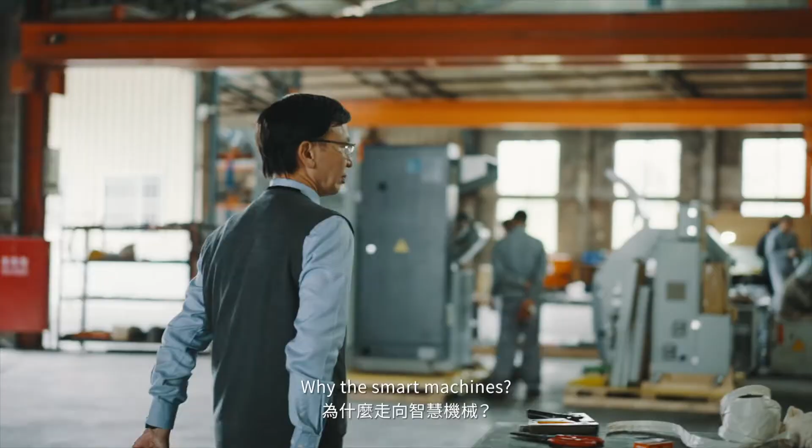Why the smart machine? Because the material is getting more and more expensive, only the smart machine can solve the problem. Being one of the major global players in the woodworking machinery industry, this Taiwanese manufacturer has been servicing customers since the early 90s.

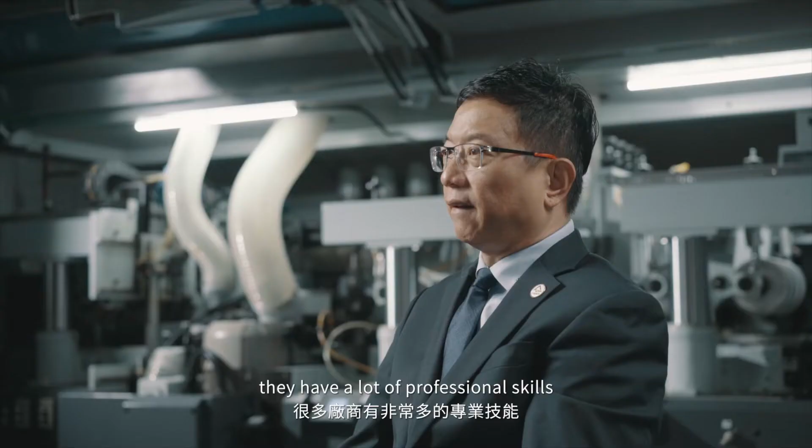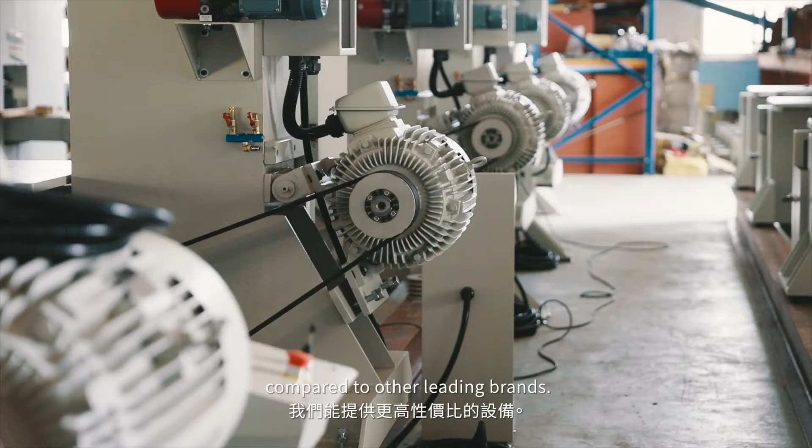In addition, we can deliver much better machine pricing and performance compared to other leading brands. And then you can use your iPhone, iPad or laptop to monitor your production situation.

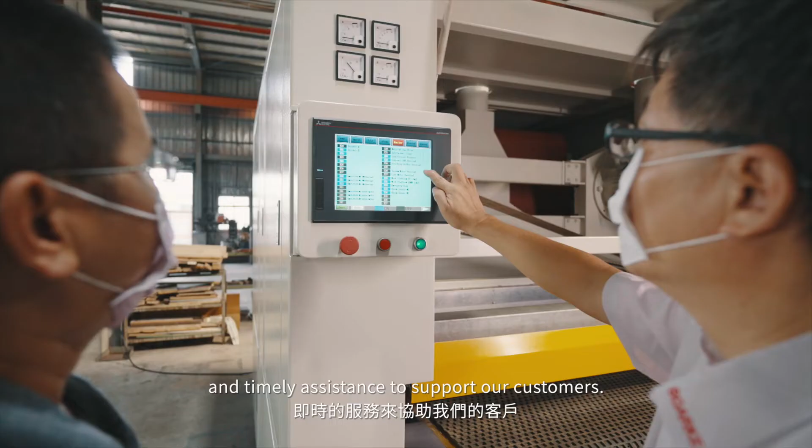How to deliver the best quality and user experience? Customer service is very important. As time goes on, we will always offer the right product and timely assistance to support our customers.

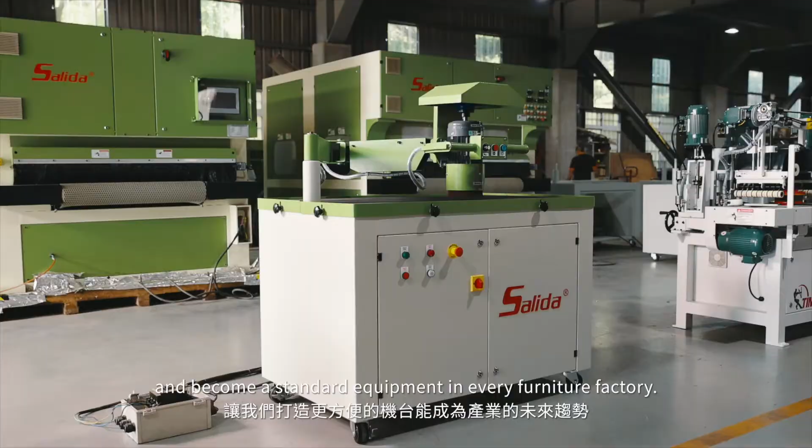To innovate our machines to be user-friendly and become standard equipment in every furniture factory. We welcome you to visit the Wood Taiwan Show. See you soon.

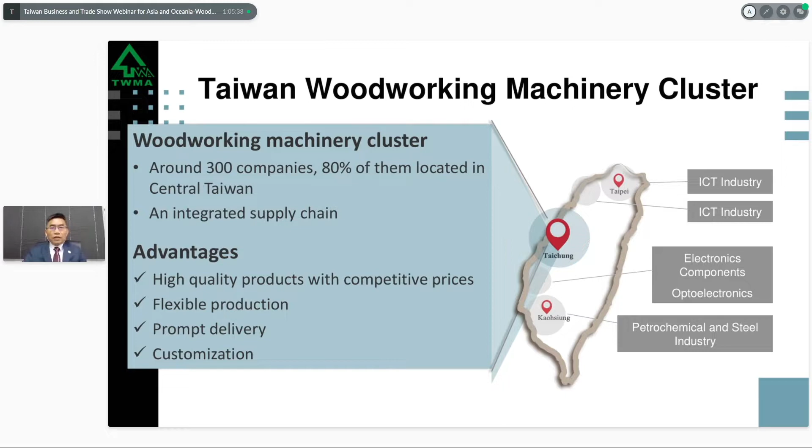We have several advantages. We produce very high quality products at competitive prices, and our production is very flexible, so we can have very quick delivery and also do customization.

Taiwan is the world's #4 largest exporter for woodworking machinery. Back in 2015, 2018, and 2020, every year we have tremendous growth in export. Last year we already reached around $700 million US.

That's a great deal. Here we can see the top 10 exporting countries of Taiwan woodworking machinery in 2020, like USA, China, Canada, and Vietnam, which occupy almost 80% of our market share. After that is Germany, Australia, Japan, and Indonesia, about 2% to 1%.

The rest of the market is in Southeast Asian countries. Nowadays, we are trying to develop and promote more in the Middle East and African countries.

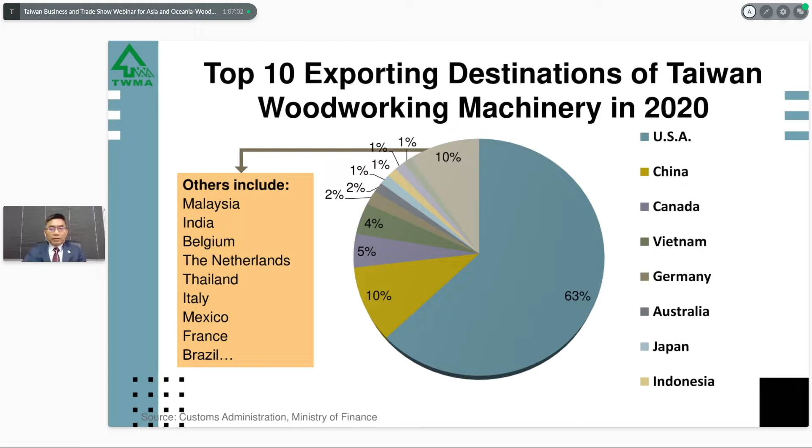Everybody knows that in 2013, Germany announced Industry 4.0, and Taiwan is trying to follow this trend. So here we have 4 sections. Number 1, Taiwan woodworking machines do automation. We develop automated equipment and can integrate all the product lines together.

Second is digitization. We do data analysis and cloud computing, and we also connect our machines together to become the Internet of Things.

Third is intelligent solutions. We help our customers produce their products, increase efficiency, and reduce costs as well.

Finally is customization. As I mentioned earlier, Taichung is a big industrial zone, so with this supply chain, we can do customized products.

The COP26 climate change meeting has already finished in Glasgow, UK, so everybody is trying to reduce carbon dioxide and use sustainable energy. Our Taiwan woodworking machinery industry is striving for green manufacturing as well.

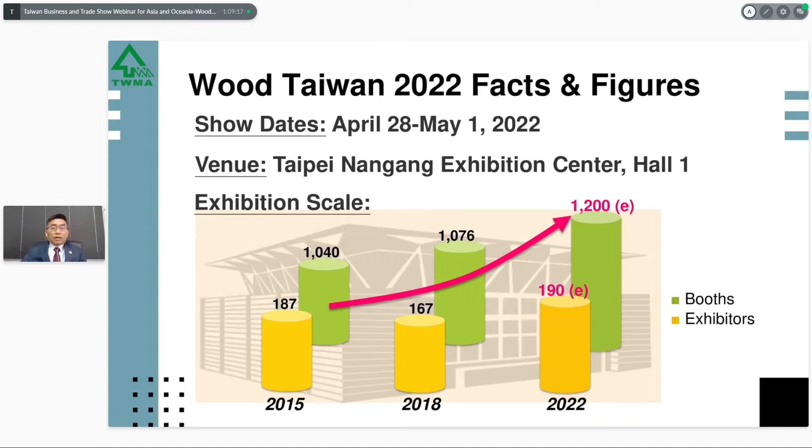We try to expand categories like hand tools, wood panels, and boards. Apart from traditional machines, we also do automation and intelligent solutions, using equipment and digital technology to provide intelligent solutions.

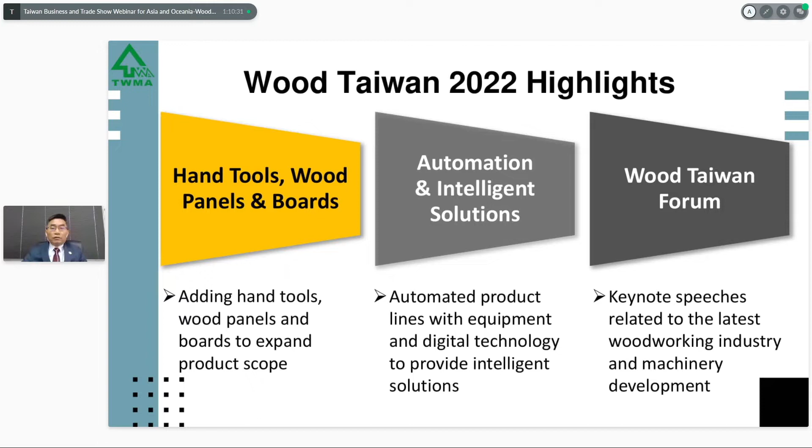In the meantime, we will invite many famous speakers for our latest woodworking machinery technology development at our Wood Taiwan Forum. We can see Taiwan is like the heart of the world.

So when we ship to North America, Australia, New Zealand, Korea, Japan, China, Russia, and Africa, it's very easy. You are more than welcome to source any kind of woodworking machinery in Taiwan. Again, I would like to welcome you to come to Wood Taiwan during April 28th and May 1st, 2022.

Okay, so this is the second topic. I'm going to talk about our virtual showroom. Here's the entrance, the lobby of our virtual showroom.

We can see many records of photos and albums, export statistics, our exhibitions around the world, and contact information for TWMA. We have 7 sponsors in 2021.

Thanks to these sponsors. As I mentioned earlier, we have nearly 300 members, so these are all the participators of this virtual showroom.

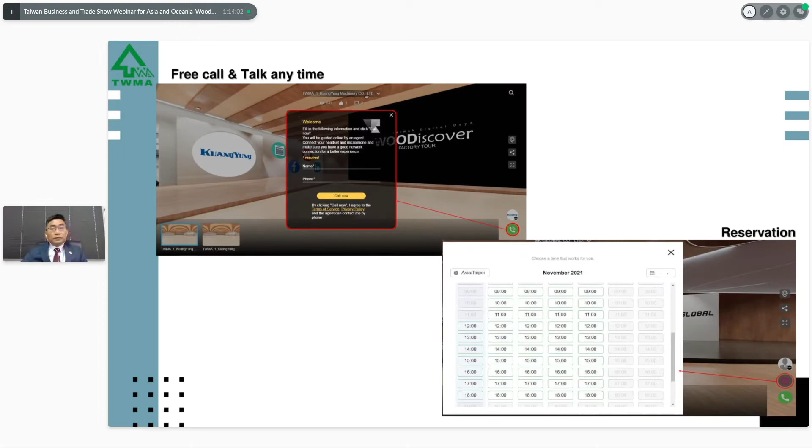So I will make a demonstration for the company tour and machine tour later, including the free call and talk at any time feature. I'm gonna make a very brief demonstration so you can understand better. You can also type www.twma.org.tw/showroom.

Okay, this is the entrance of our virtual showroom. See, it's totally different from our traditional website. So we click the sponsors here, for example, we will have a company tour.

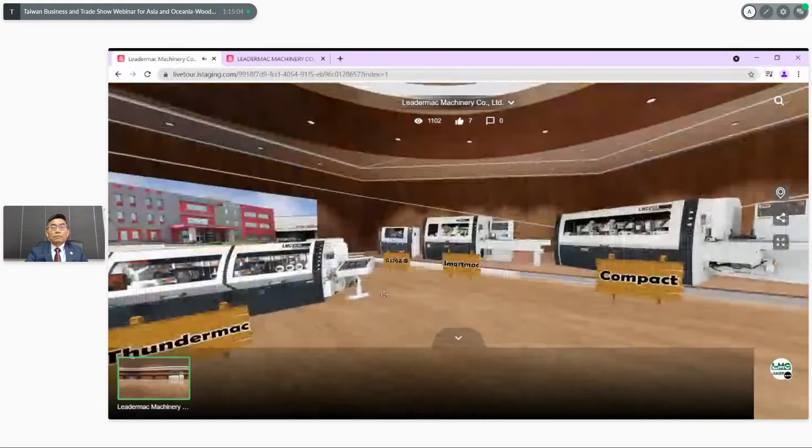You can show your company as well. You enter the main office and go to maybe the smart manufacturing room.

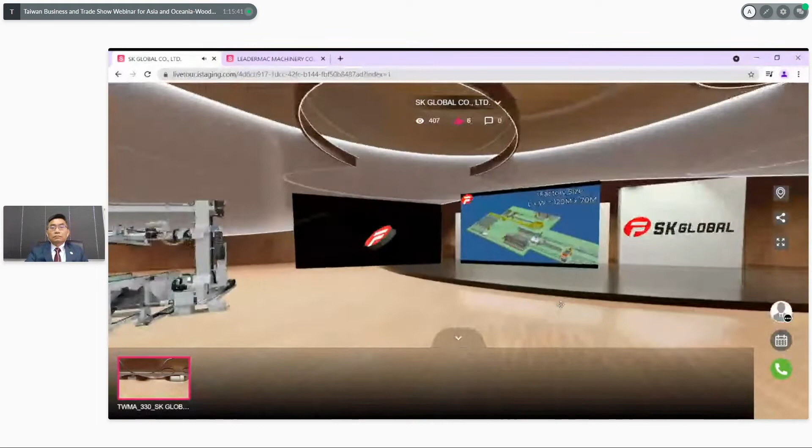And you can go to the showroom. Next is the machine tour example. You can have the video, you can see the 3D animation, and you can see all the machine photos in real and all the specifications.

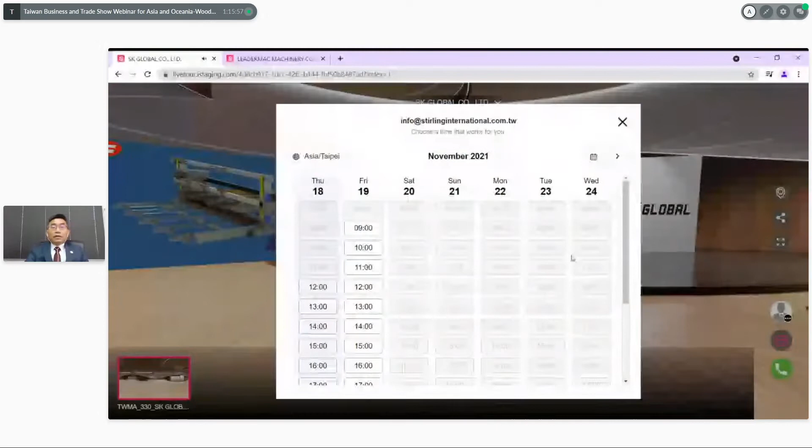Here is very interesting. You can see that we try to make time and days so you can reserve when you want to talk with the supplier. Just simply leave your name and email and submit.

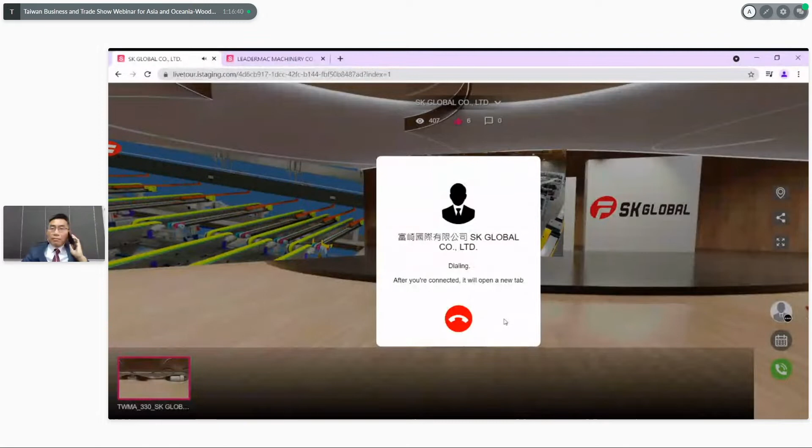You can make a phone call at any time, and the supplier will guide you. Like now, I'm making an example call. So when I receive this phone call, I can guide the buyer to see all our machines. See how this is very interesting, right?

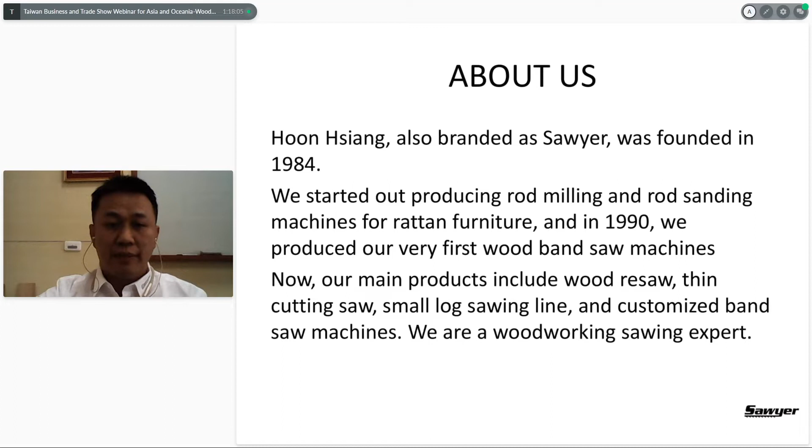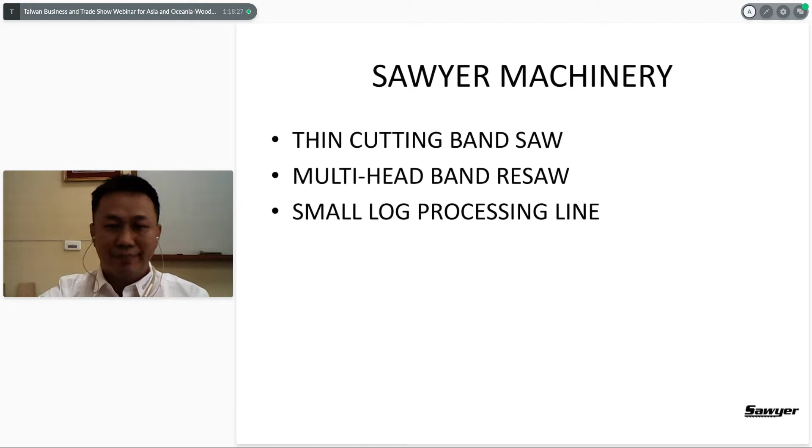Anybody cannot hear me? So for the thin cutting band saw, we can do engineered flooring, musical instruments, and the multi-layer of interior furniture. Let's play the video.

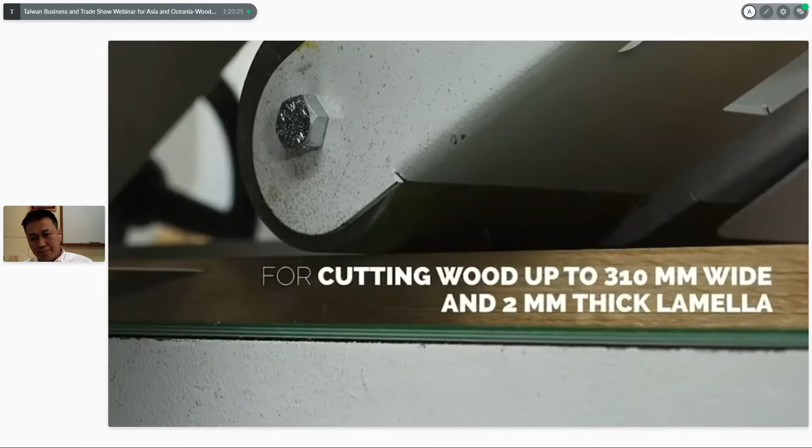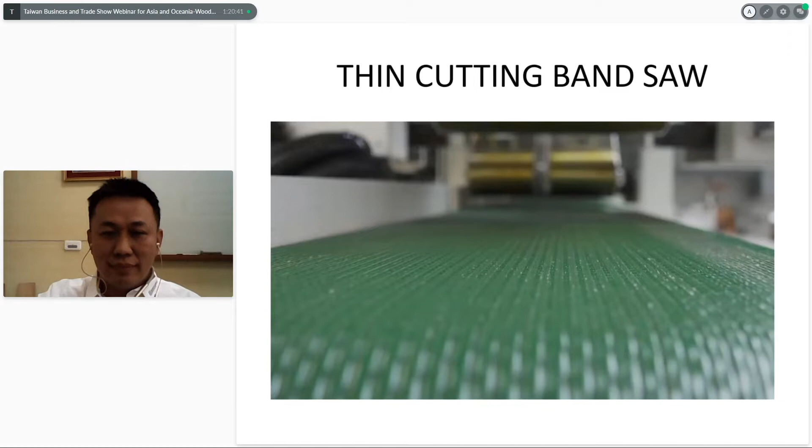Okay, with the thin cutting band saw, our advantage is we only have a 1.2 millimeter saw kerf. Compared with the circular saw, we save the material. Okay, let's see the second.

It's a multi-head band resaw. For the multi-head band resaw, we have the horizontal type and the vertical type. For the horizontal type, you can choose one head up to 6 heads. For the vertical, you have a single or two heads.

This machine is good for saving. For example, with a 2-head band resaw, you can cut 2 times with 1 pass, so you save 2 people.

Then, next is the small log processing line, which is a custom machine. We talk with the customer to see what the customer needs, then we develop the machine. Let's play the video.

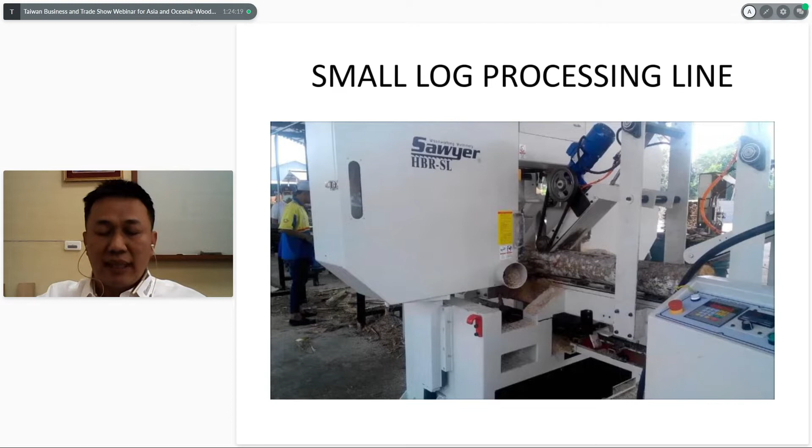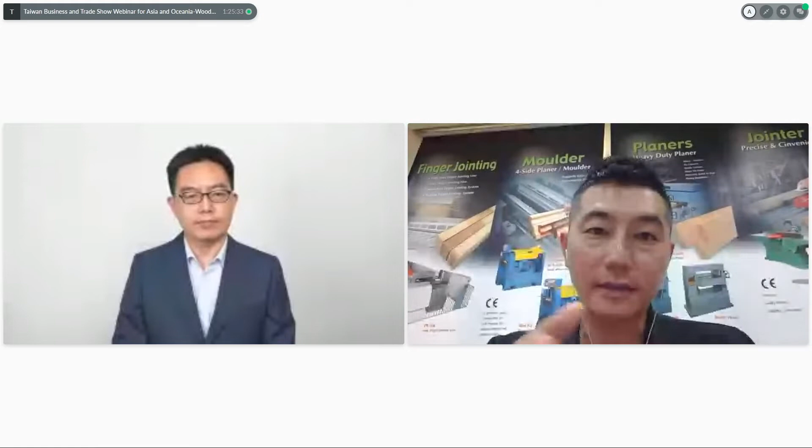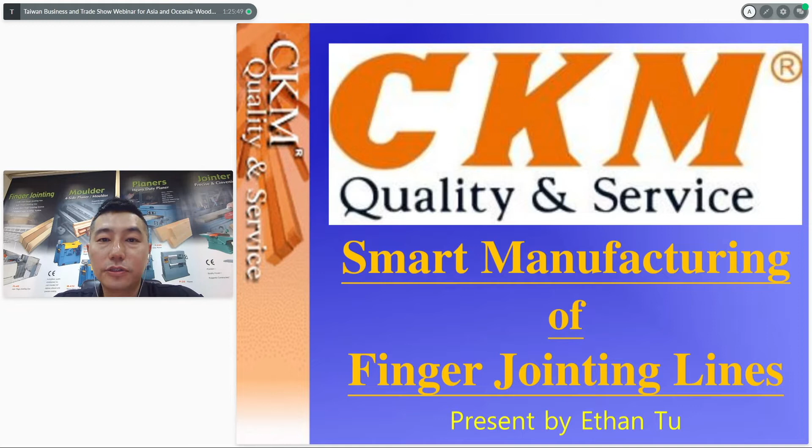Hi, thank you Mr. Eli for the introduction. Ladies and gentlemen, my name is Ethan Tu. I'm here to present to you our smart manufacturing of finger jointing lines. And before I do so, I would like to briefly introduce CKM company to you.

CKM's full company name is Zhenguang Woodworking Machinery Works, established in 1966. We are located in Taichung, Taiwan, and have 55 years of history making woodworking machinery.

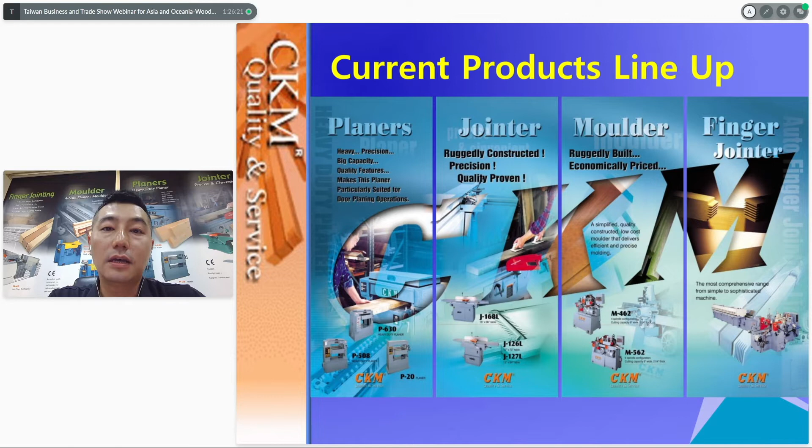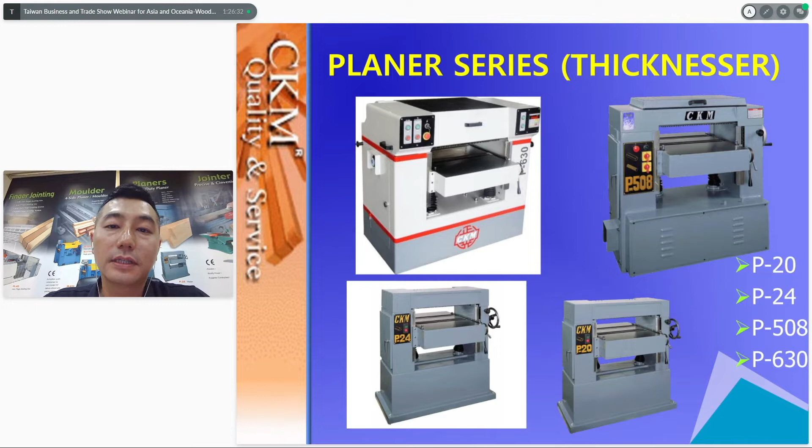Our current product lineup includes finger joint lines, planers, jointers, and light duty 4-side moulders. For jointers, we have 3 models. For planers, we have 4 models. For the light duty 4-side moulder series, we have 2 models.

For the finger joint lines, today's topic, we have been building finger joint lines for over 41 years, starting from manual up to fully automatic, and also vertical type and horizontal type.

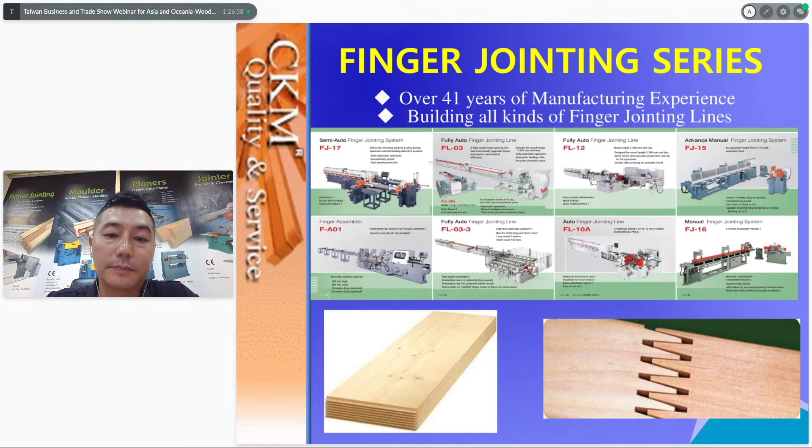Let's play the video. I'll show you what it is.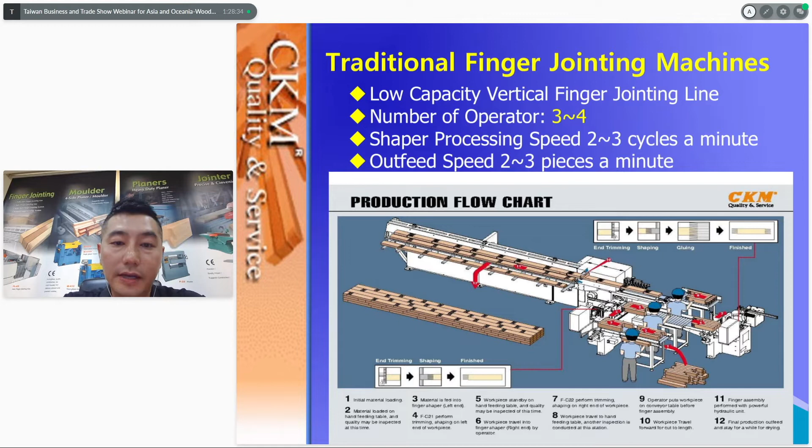Because of this, we realized that nowadays labor is very hard to find and salary costs are getting higher. So in year 2000, we developed and upgraded our system to a high capacity, fully automatic finger jointing line. It increased the speed from 2 to 6 cycles, and reduced the operators from 4 down to 2. Let's play the video.

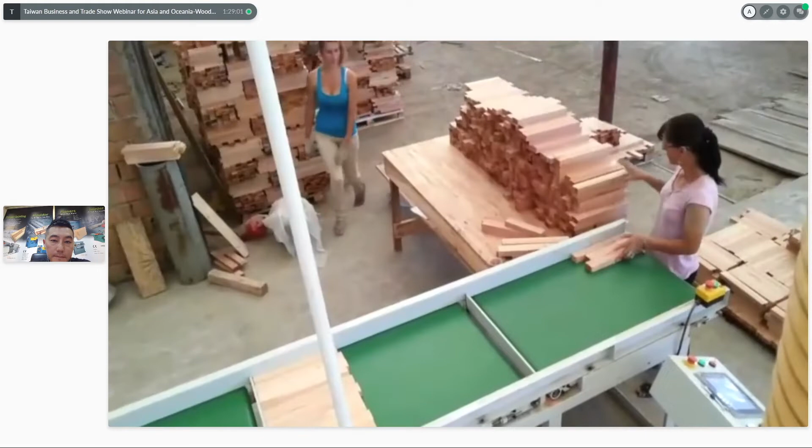In this video, you can see we use a conveyor type to get the products into the press. Only 2 ladies are needed to operate these machines.

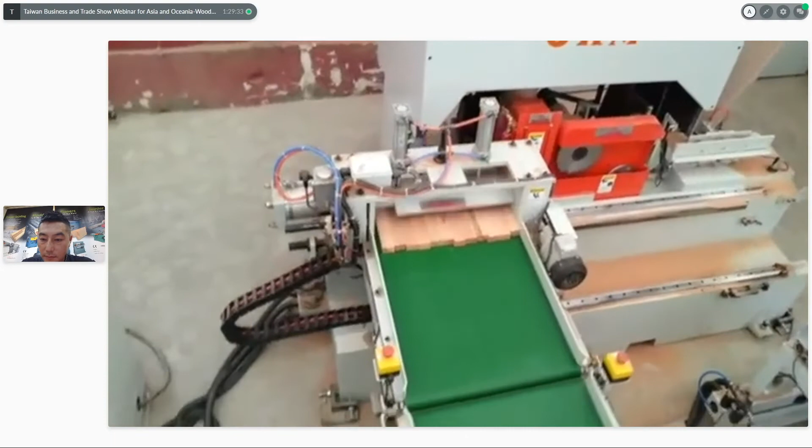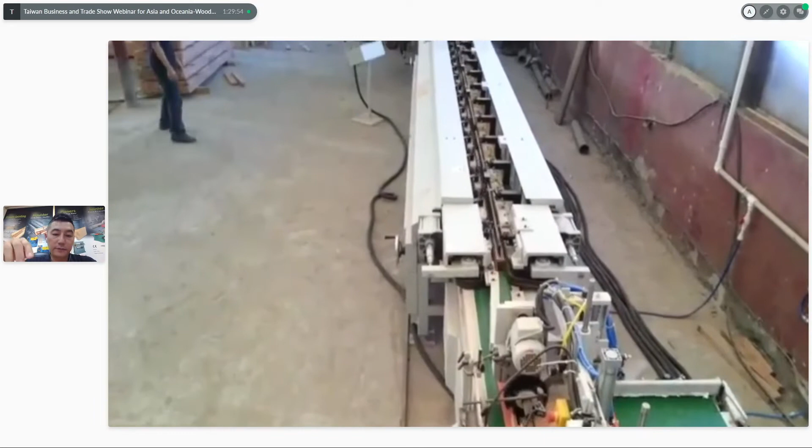There's no middleman in between the shapers. The conveyor type transfers material from one shaper to the other, and we also use flipping tables to get the material from the shaper to the press. So there's also no middleman in between the shapers and the press.

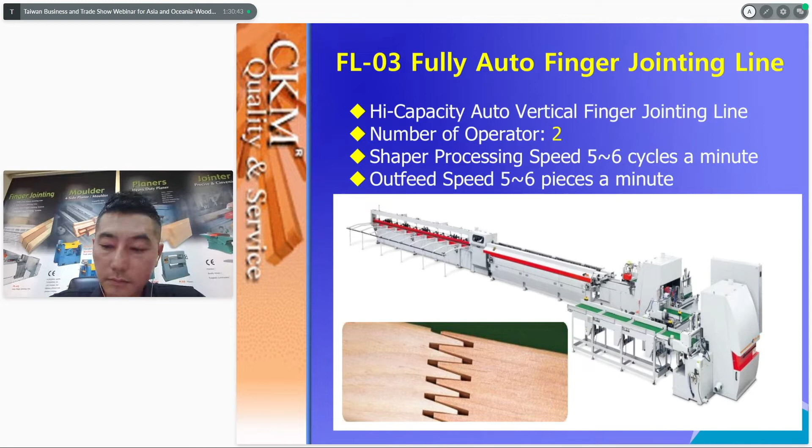Not only the vertical machines have we upgraded to a fully automatic line, but also the horizontal type products we have upgraded to a high capacity horizontal finger jointing line. Let's play the video.

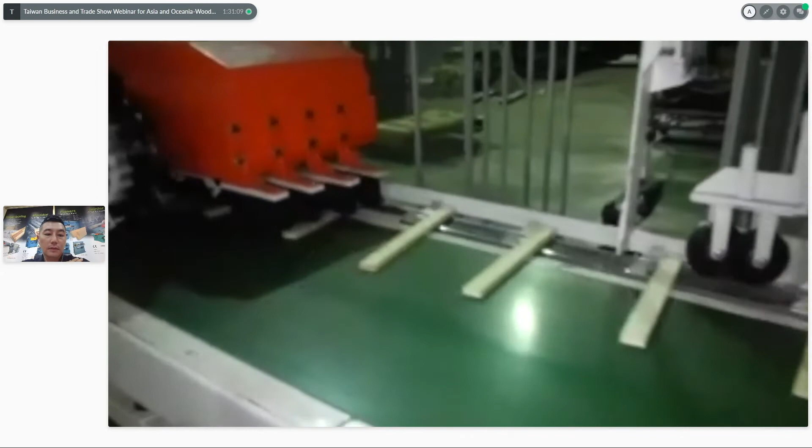If your product is mainly horizontal type, this is the right machine for you, because it can produce up to 120 pieces a minute. Output is seven pieces a minute.

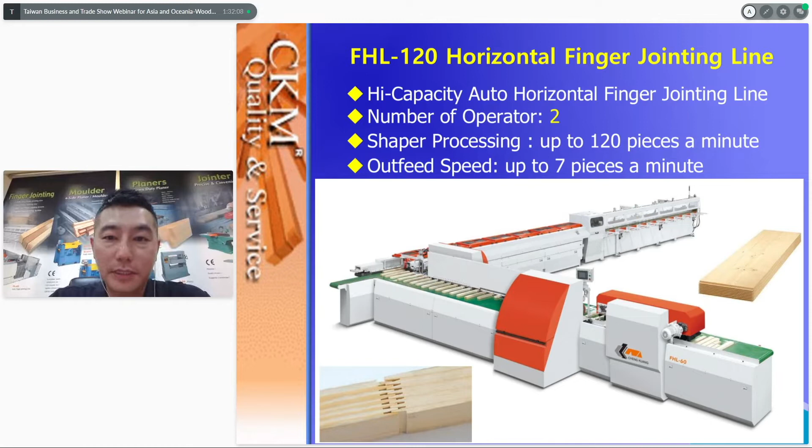That's the finger jointing machines. As I said, we know that operators are very hard to find nowadays.

So two years ago, we developed a new product called stackers, placed at the back of the press, which reduces the two operators needed to simply carry products on and off after the press. We use a touch screen to operate it. Let's play the video and I'll show you what it is.

In the video, you can see that normally you would place operators at the back of the press just to carry the output out of the press. But with this stacker, you can eliminate those operators.

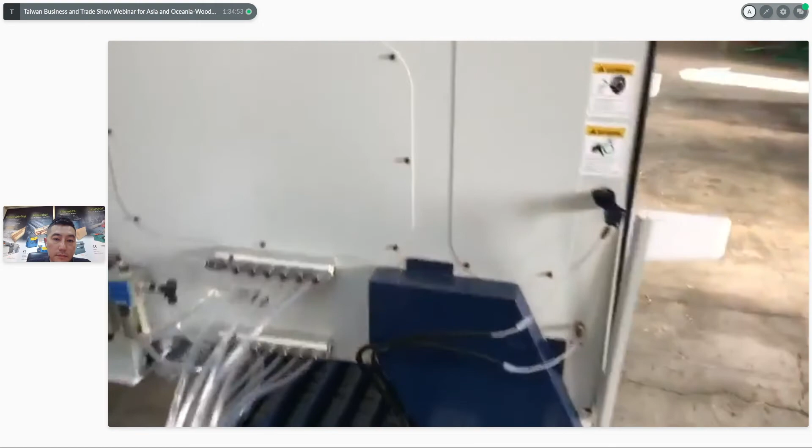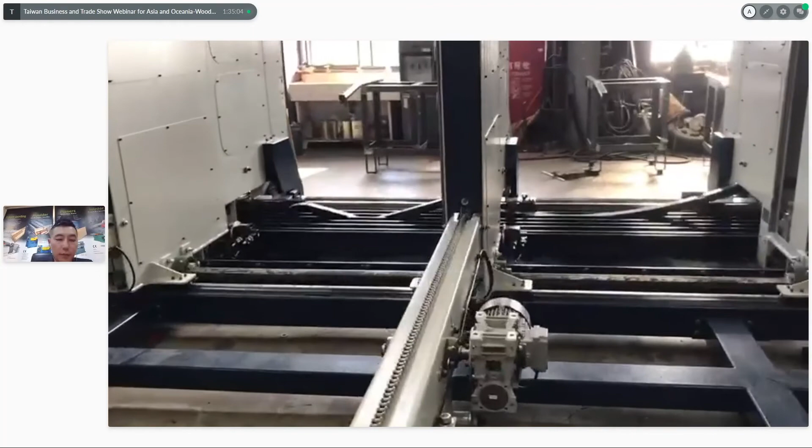Once you type in the position where you want to pick up your product, along with the length of your materials, the pickup head will automatically go to the position you set up. Very easy.

With all the machines combined together, fully automatic plus stackers, this year we upgraded to a fully automatic line with everything together, which helps reduce the operators from 4 down to just 1. At the back of the product, you simply use a forklift to pick it up. Let's play the video.

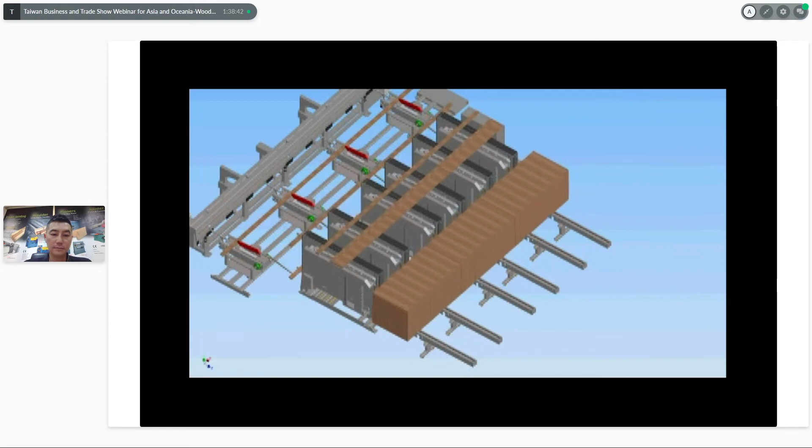After this video, with these machines, you can really minimize your waste and maximize your profit. If you have more questions about finger jointing lines or any products that we made, please feel free to contact me.

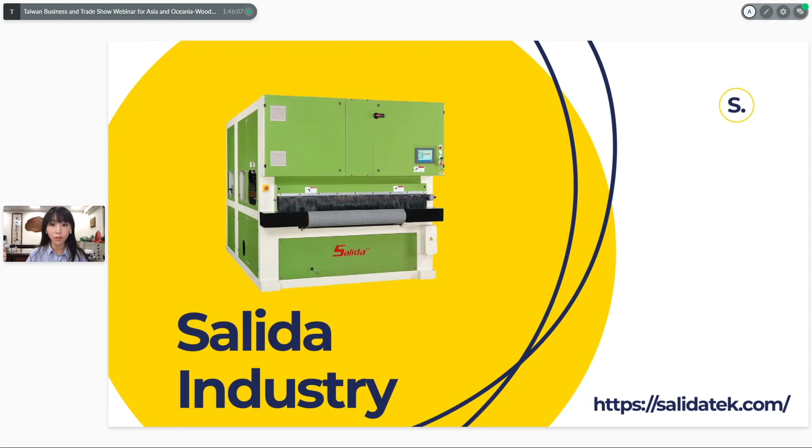Salida Industry was established in 1992 and has manufactured various surface sanding machines for more than 30 years. We produce not only woodworking machines but also metalworking machines for OEM business.

Firstly, I would like to introduce our woodworking sanding machine. This is our heavy-duty type of woodworking machine. Our H2RB is an advanced sander that is proficient in sanding various types of panel. The main idea of the H2RB is to avoid the main disadvantage of today's drum-based sanding machines.

Drum-based sanders generally work with a sanding drum that is only in a tiny area in touch with the workpiece. Our H2RB sanding belt includes 96 sanding strips and provides a wide sanding area in touch with the workpiece, so this machine reaches all edges and leaves no dead corners. The adjustable sanding option on the PLC helps the operator set the machine to their special sanding requirements.

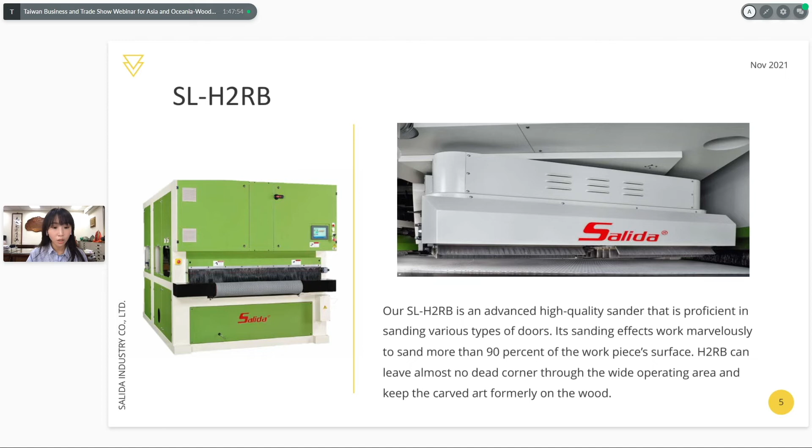And then I would like to show you this machine. So let's play a video for the H2RB.

Next, I would like to introduce our Moulding Sander 300 series. The Moulding Sander 300 series is a very well developed product, providing 8 functioning heads. The Moulding Sander 300 series linear brush sander is designed to help with everyday linear profile sanding needs. It can be used for white wood sanding and sealer sanding for linear parts such as molding, flooring, furniture components, and window parts. The machine works well as a standalone unit or as part of a finish line.

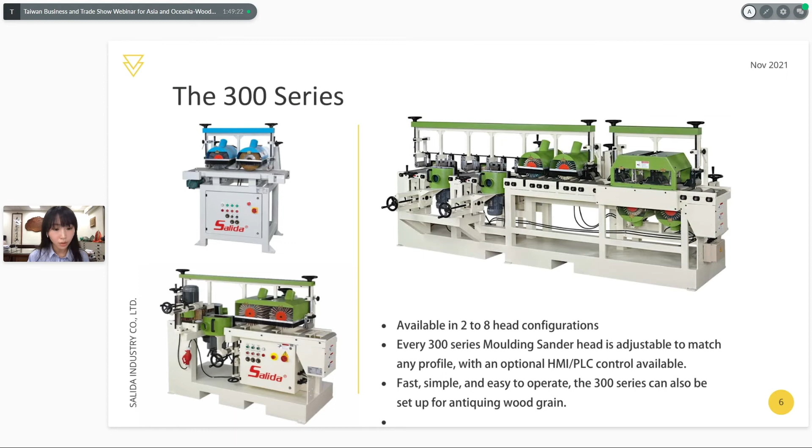Next, I would like to show you this machine's details. So let's play a video.

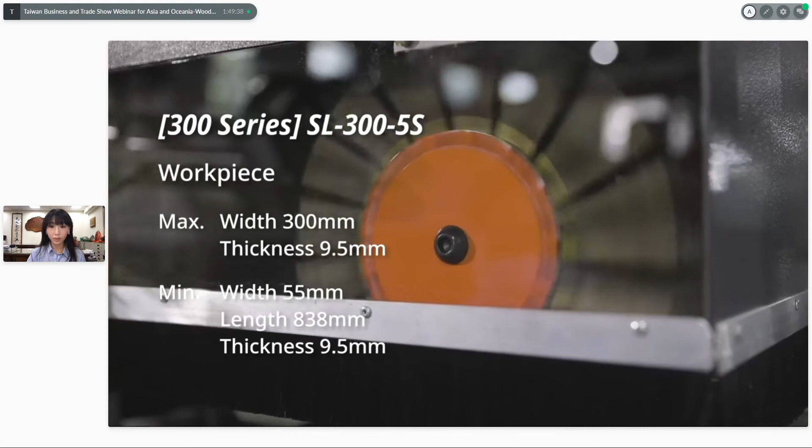And then I would like to introduce our metalworking machine. This is our heavy-duty type of metalworking machine. The rotary deburring machine is the most advanced system in the current industry. The RRA rotary brush machine is an automatic machine for deburring, finishing edges, laser oxide removal, and heavy slag removal. It can also process deburring work for different shapes or thicknesses of metalwork at the same time.

So I would like to show you more details about our RA. Let's play a video now. Thank you.

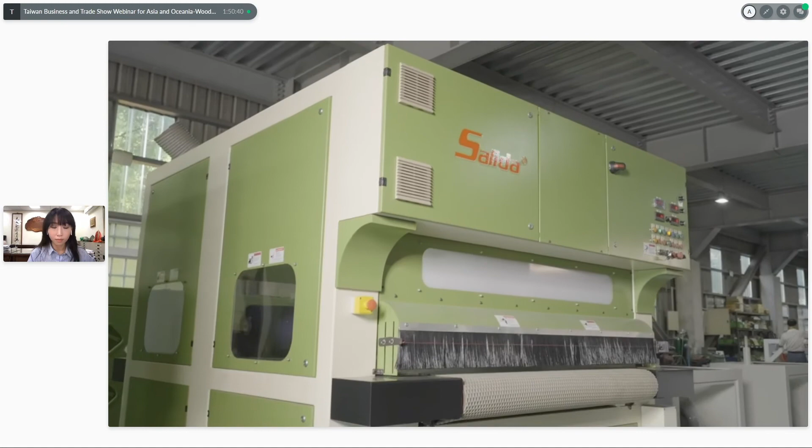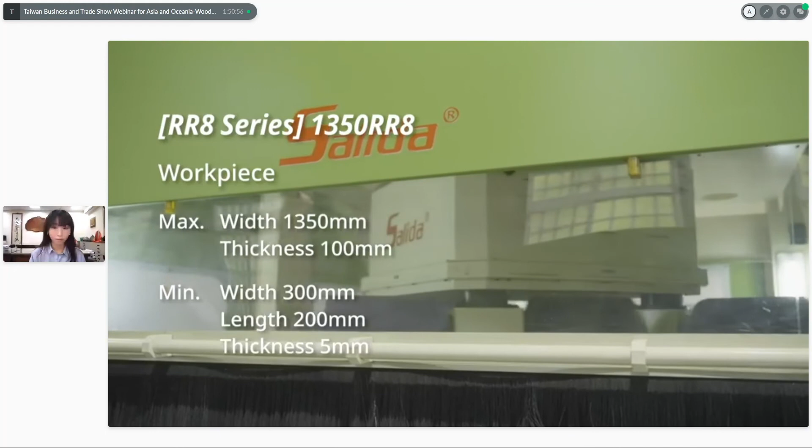And then for this part is our SL-948. This high efficiency economic model is subject to deburring metal sheet surface. This machine is very easy to operate. You just need to ensure your workpiece size and the adjustable common belt, and then you can easily operate it.

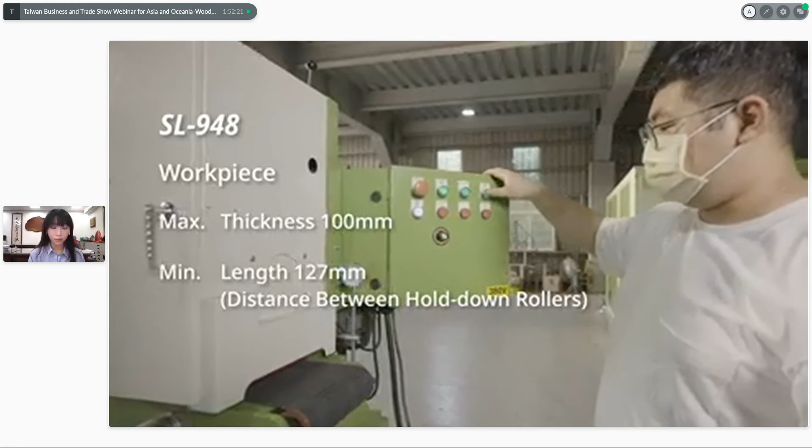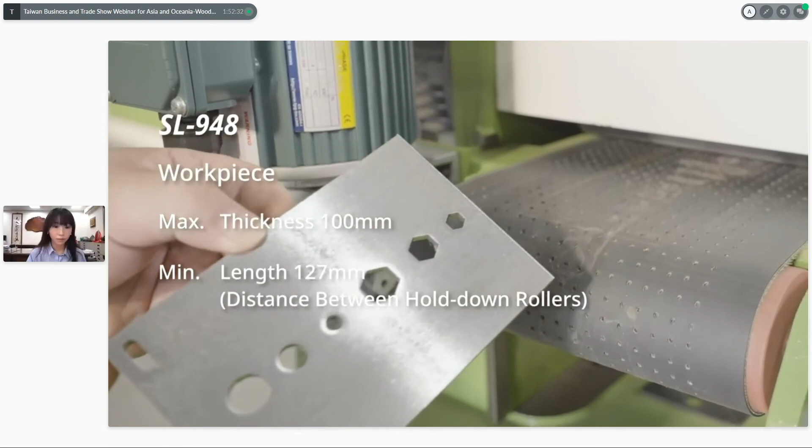And then the last part is our MT30. This machine is a very, very user-friendly manual deburring machine. It has two hand legs that can be fitted with various types of abrasive sticks, including different types of pads and brushes for deburring, edge rounding, finish, laser oxide removal, and heavy slag removal. Also with 180-degree rotating shape, it's quick and easy to switch different consumables.